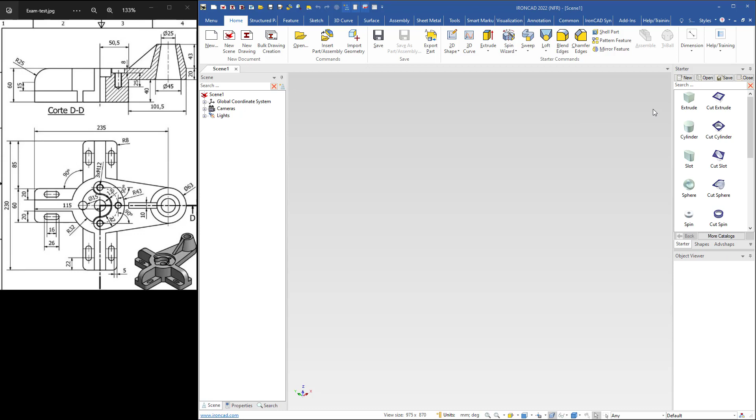So I will start with this part of the item. I come over here to drag an extrude shape, drop it here. And we see that the width is 60 and the height is 60 and the length to the center is 115, so I will change the width to 60 and the height to 60 and the length here to 115.

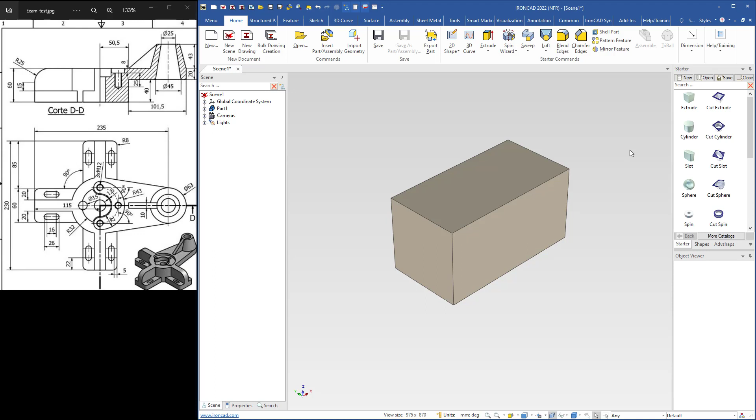And then I need to cut here on this side, and on the other side we see it here. So I will use a cut extrude, drop it here. Then I grab this handle and use the shift key to snap to this side, and I do the same here. Use the shift key to snap, and the same on this side.

And the width of the cut should be 20. So I select this handle, type 20, and the depth will be 25 plus 15. So I click on this handle, 25 plus 15, hit enter.

Then I need another one on the other side, so I turn on the TriBall, and I move the TriBall by pressing the spacebar to unlock it first. Then I can right click the center handle, midpoint of edge and this edge. Lock the TriBall by pressing the spacebar again. Right click on the orientation handle, mirror and link. So now we have made a cut on the other side.

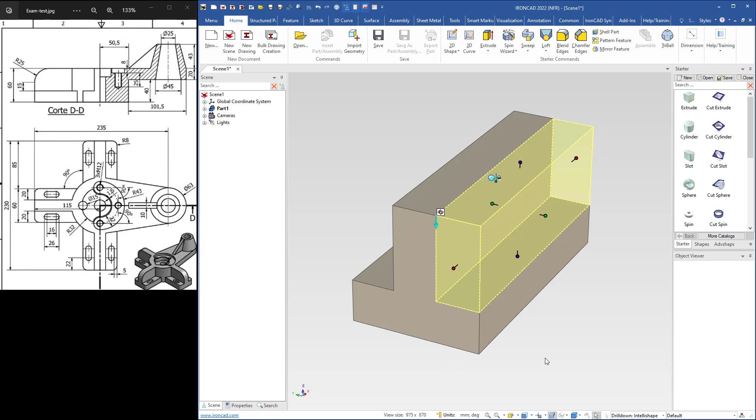Then I need to add a slot, or cut a slot here. So I use cut slot from the catalog and drag it and drop it here on the midpoint. Make it go through the part. Use the shift key to snap to the bottom.

And the length of the slot is 26. So I click on this handle, type 26 and hit enter. And the width is the difference between 16 and 26, and that's 10. So I type 10 here and hit enter.

Then it should be positioned 5 millimeters from this edge. So I turn on the TriBall, and the TriBall is positioned in the center, so that means that the distance between the center and this edge is 5. So if I now right click here, edit distance from point, this side, it should be 10, and it is 10 millimeters.

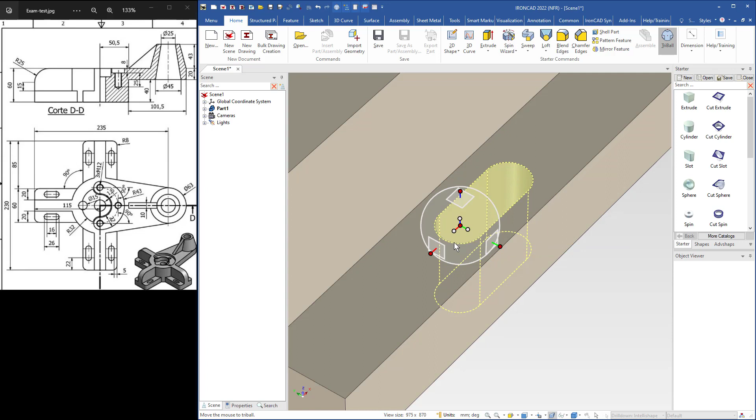Then I will position the slot 22 millimeters from this edge. So I have to move the TriBall, unlock it, right click to center point of this arc, lock the TriBall. Now I can right click this handle and choose edit distance from point, this side, and that will be 22 millimeters.

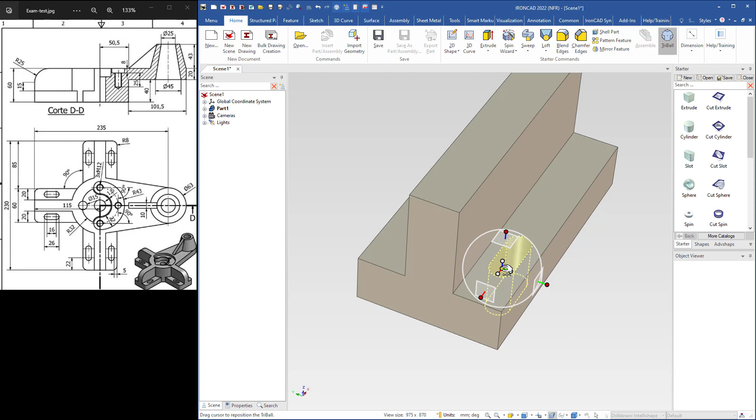So now I had to copy this slot to the other side, so I will use the TriBall to do that. Deselect all axes and unlock the TriBall, right click on the center handle and move it to midpoint edge, this edge, lock the TriBall, right click the orientation handle, mirror and link. So now we have the slot on the other side as well.

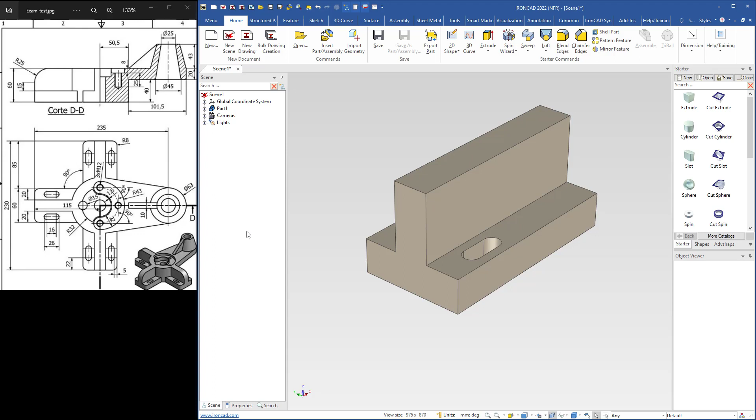Then we have to round this edge and these two. So that one is 25 and these two 8. So I come up here to select blend edges, select this edge, and here in properties I type 25, hit enter.

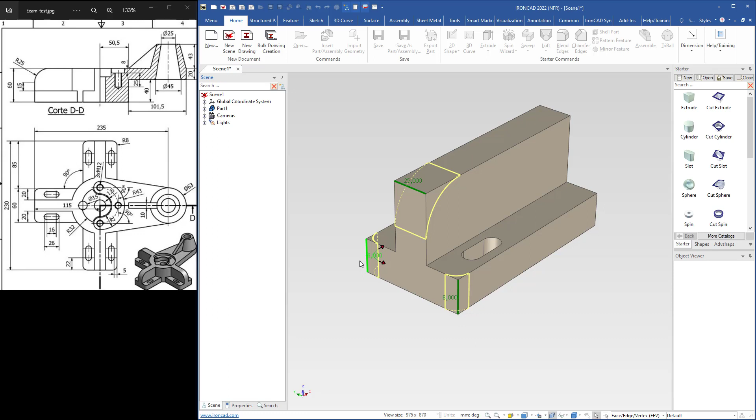Then I select that one and change the radius to 8, hit enter. So now I can select the other one and hit enter again to confirm the command. So now this part is now finished, so I need 2 more.

So I select it, turn on the TriBall, then I move the TriBall to the center here, and that will be the center of this hole. Unlock the TriBall, right click, midpoint edge, this edge, that's the center.

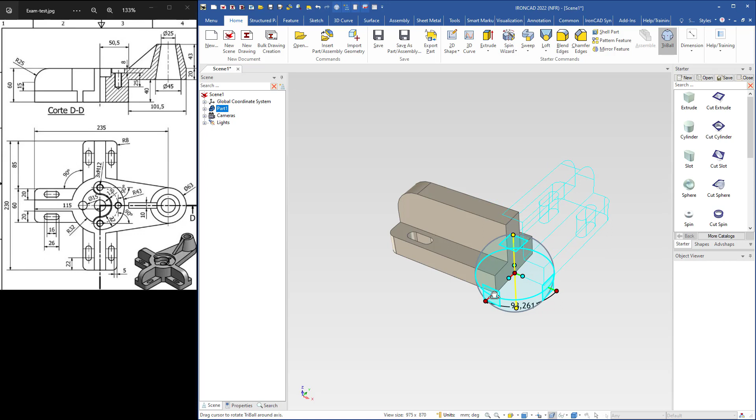Then I lock the triball, select this axis, then I right drag inside in this direction and copy 90 degrees and make sure that reset triball is not checked. Click OK. And the reason why I don't want the reset triball to be checked is, if it's not checked, the triball will be positioned here where I placed it from the beginning, and this part will also be selected.

So now I can right drag inside the triball again, but this direction, right drag and drop it there, copy 90 degrees and click OK. Then I remove the triball.

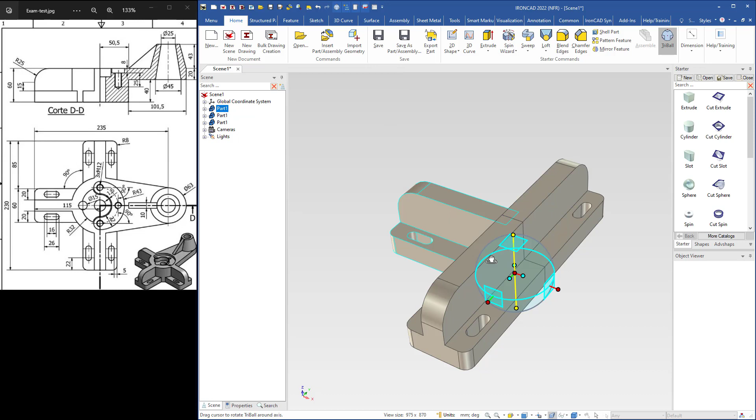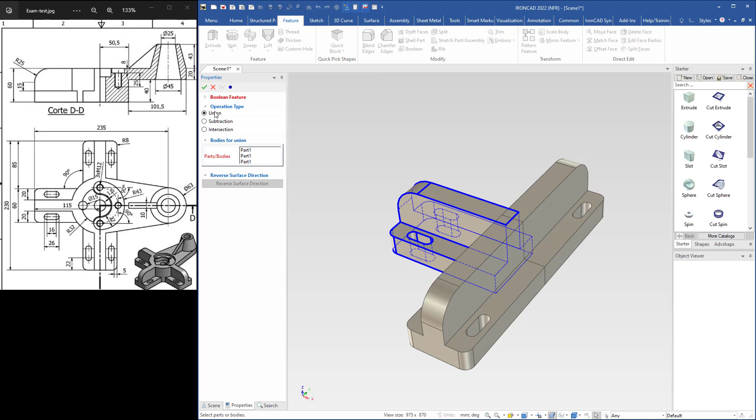So now we have 3 of these, but we need only, but it should be one part, but there are 3 parts. So when that one is selected, I press Shift and Shift select the other 2. Then I come up to Feature up here and select Boolean. So now use Union and click OK. So now there is only one part.

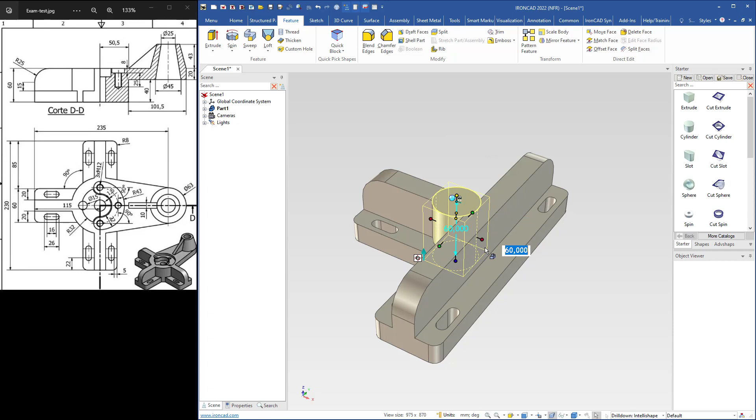Then we will add this cylinder. So I grab a cylinder and drop it here on the center point or the midpoint, then grab this lower height handle, the blue handle, and use the Shift key to snap to the bottom here. Then I use the upper height handle, use the Shift key to snap to the top. We don't know the diameter here because there is no dimension for it.

So we have to figure it out. But I will move this cylinder to the center. So I turn on the triball, right click this axis and choose midpoint edge and that edge. Now it is positioned in the center. And then I remove the triball.

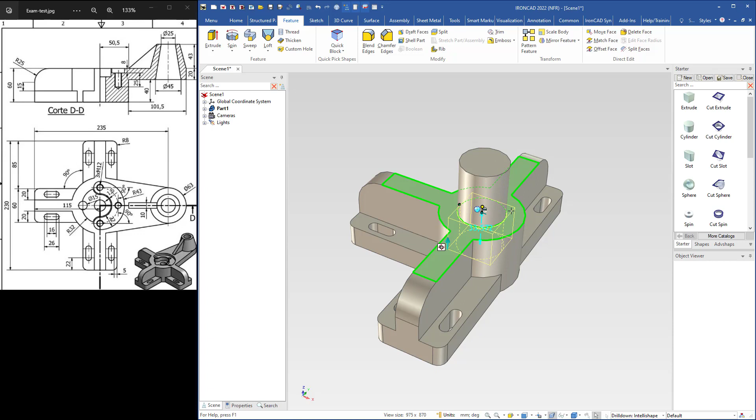But before we decide what the diameter is, we will add this cylinder. So I left drag the cylinder and drop it here so it will be a part of that one. Then I grab the lower height handle to drag down a bit. Then I grab the upper handle, use the Shift key to snap, and change the diameter here to 63 because we have 63 here. Hit enter.

Then I use the triball and drag this cylinder out a bit. So now we have to decide how far this cylinder is from the center of that cylinder. Well, we will use our calculator. I'll drag it here. We see that this distance is 235 to the center here.

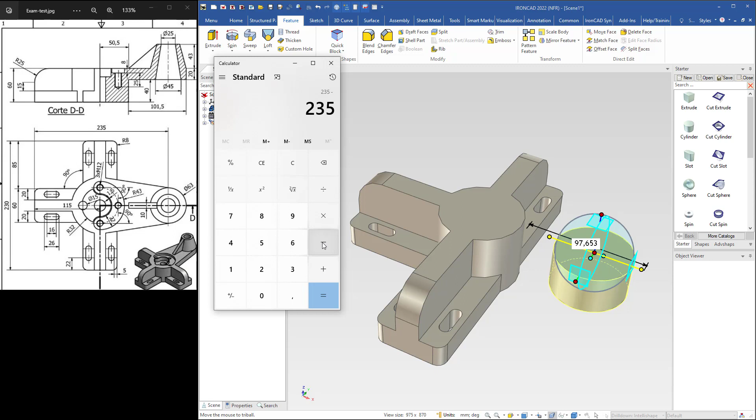So I will remove that one. 235. And the distance from that edge to this center is 115, minus 115 equals 120. So we have to add 120 here to get it in the right position. And then I remove the triball and change the thickness.

The thickness is 20 millimeters, we have it up here. Select that handle, type 20, and hit enter.

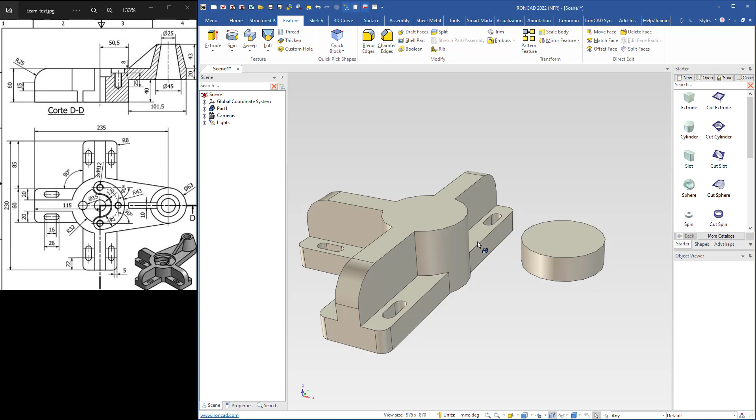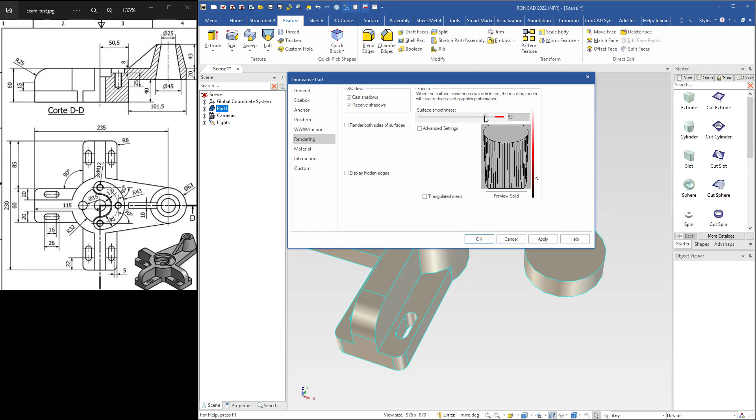If you see that the parts are a little bit edgy, we can select the part, right click, go to Part Properties and Rendering, and increase Surface Smoothness up to 60 or even more if you want, but 60 is okay, like so.

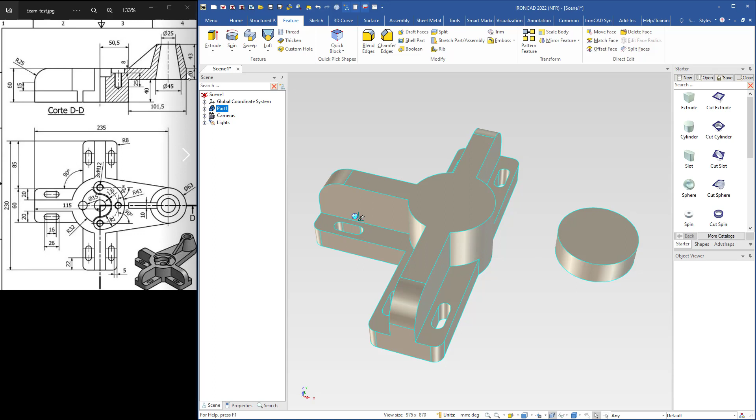So now we have to figure out what is the diameter of this cylinder. Well, we know that the distance between this center and that center is 120 millimeters. And we have also this dimension that the distance from this side of the cylinder to this side of that cylinder is 101.5. So we'll do like this.

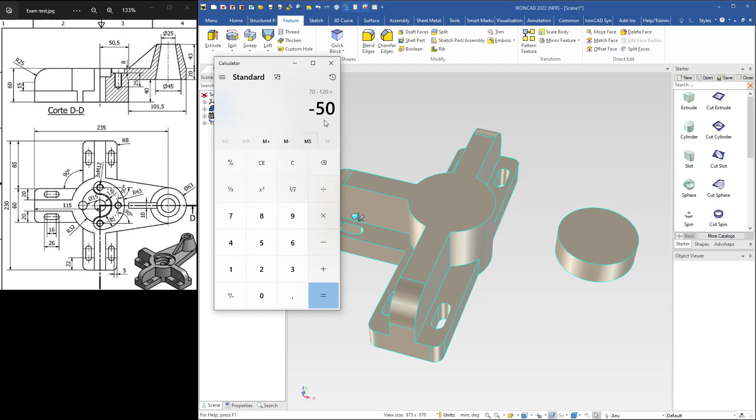I will remove that, 101.5. And then we need to remove the radius from the diameter of 63, that's minus 31.5 equals 70. So we have 120 and we have to remove 70. That means if I now click minus 120 equals minus 50. So the radius of this cylinder is 50, that means the diameter is 100 millimeters.

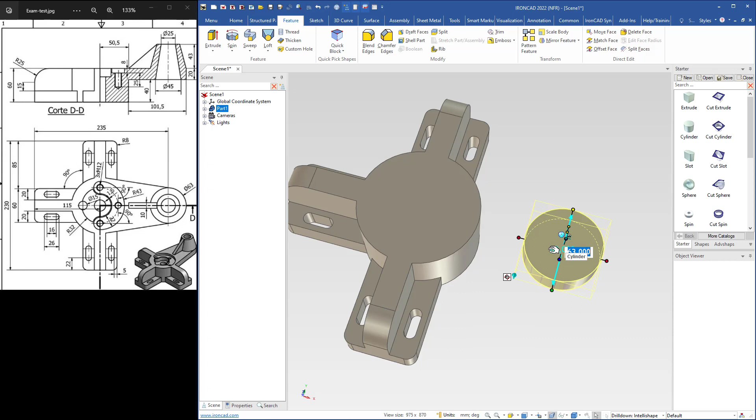So type 100 and hit enter, like so. And then we need to connect these two, so I select that one, right click and go to edit cross section, and now we are going to connect these two.

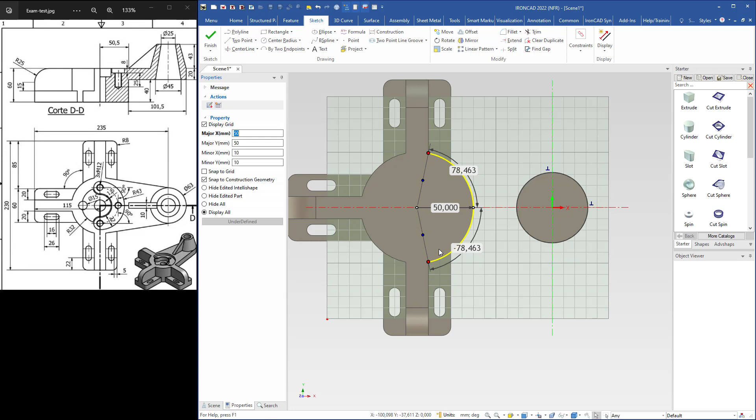First I will go up to project, and we're going to project this side or this part of the cylinder so that we get an arc. Then I press escape to exit the project command, and we extend this arc a bit by grabbing the handles, like so. Now we can come up here to select 2-point line, and I will drag a 2-point line here, and on this side press escape to exit the drawing command, grab this endpoint and move it to the arc.

We see that now this tangent constraint is visible. Now I can right click and lock it. Do the same here, right click the constraint and lock it. Then I come up here to constraints, use tangent, select the line and then the circle. Do the same on this side, like so.

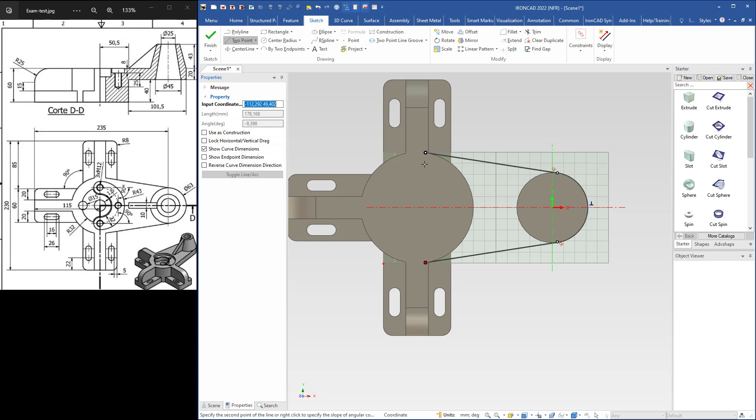And then I can use trim to trim these lines and this circle, and that one, and this one, that one, that one, and also this part. Then I use a 2-point line to connect these two endpoints. Then I click OK. So now they are connected.

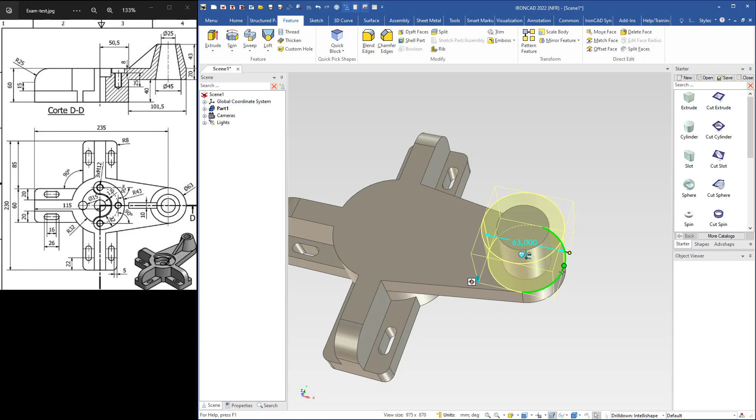Next step is to add this cone. So I will drag a cylinder, drop it here in the center, and it should be the same, the diameter should be the same as the diameter of that one. So I snap it to this edge, and the height should be 43, as we see here. So I type 43 and hit enter.

And then we will also make a cone of that cylinder. So we go to IntelliShape level, right click and go to edit feature options, and here we have draft inward.

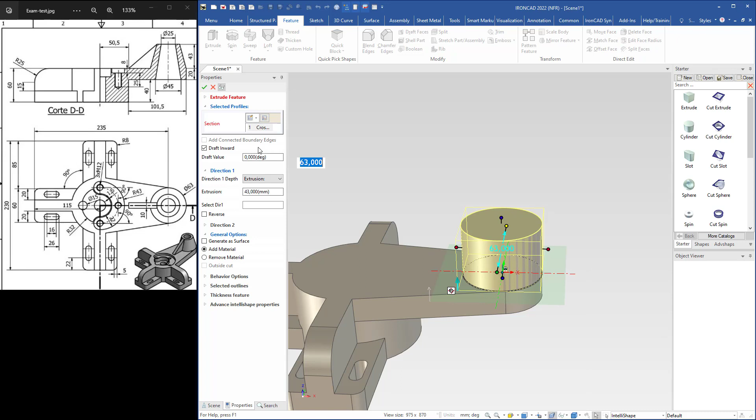So we change the degrees, and I've done this before, so I will try with 15. We see that this will be the preview. So type 15 and click OK, and it will look like this, and I think it will be alright.

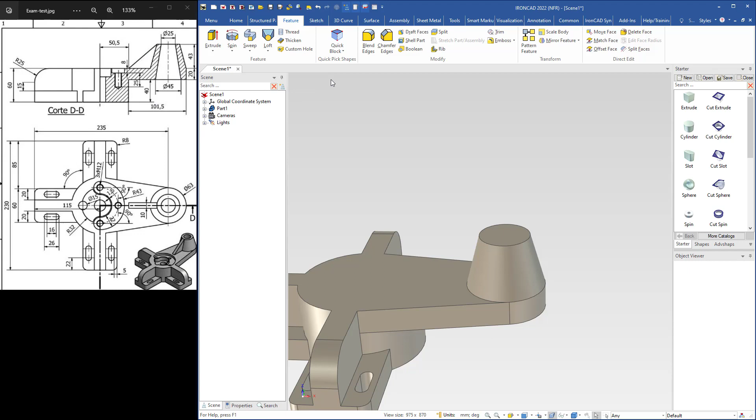Then we will cut this hole, and to do that we go back to the Home tab and use Spin Wizard. Click Spin Wizard, click here in the center, and we're going to remove material, click Next, 360 degrees along the selected surface, and then I click Finish, and we get this grid where we can draw the cross section.

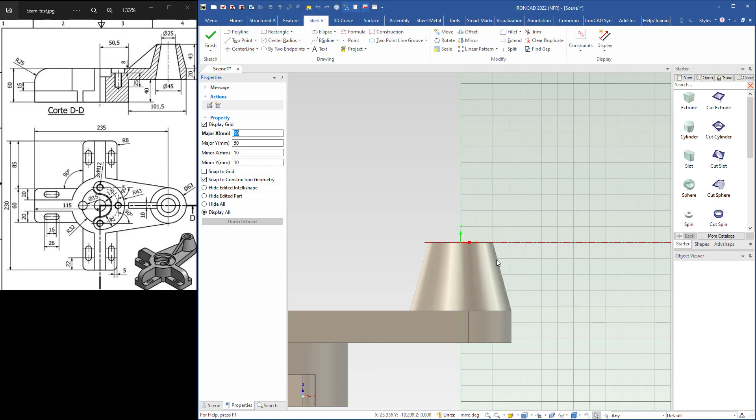So then I come up here to project, select this edge here, and then this one. Then I press escape to exit the command. Then I come down here, drag the endpoint to the y-axis, and then I click on this side and make sure that this arrow is pointing in this direction.

Now I can double click this value, and we see that the diameter here is 45. That means 45 divided by 2 to get the radius.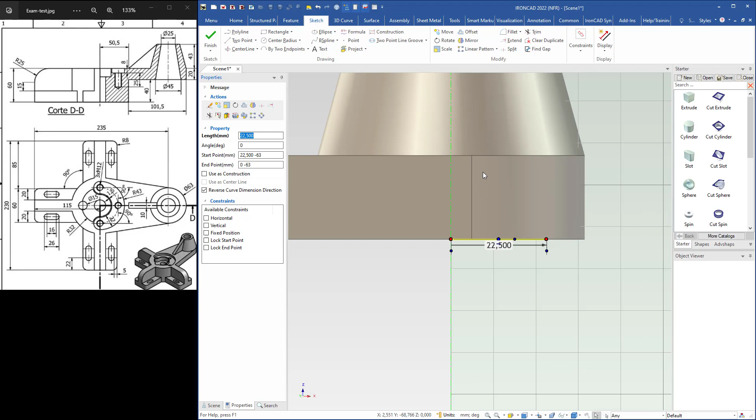Then I come up here, select this line, grab this endpoint to the y-axis, make sure that the arrow is pointing in this direction, and here we have 45, double click the value, 45 divided by 2, and hit enter.

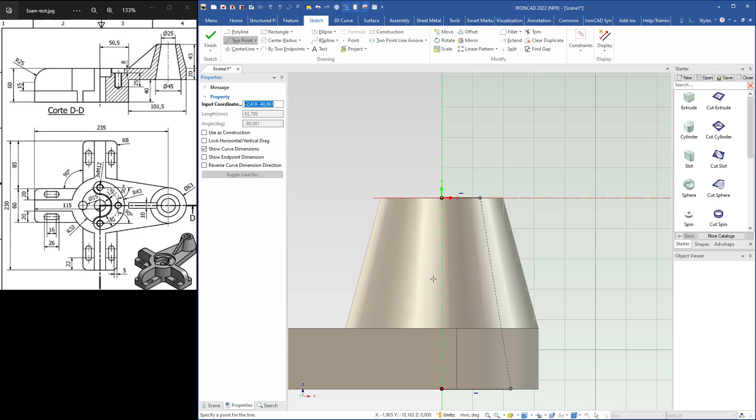Then I come up here to select 2-point line, click on this endpoint and this endpoint to connect them, and we don't have to add a line here in the center, because when we click Finish, Ironcad will add that line for us, like so. So now we have added that hole, or cut that hole.

Next is to add this support, or this rib, and here in Feature we have a rib command, but before we can use it we have to draw a guide curve or a guideline. So we are going to use a sketch.

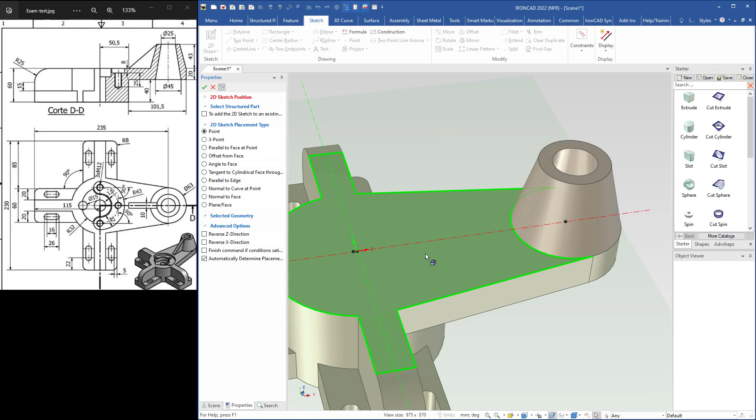So I click this button here, then I select this midpoint so that we get this plane in the center. Then I click OK to add it. Then I turn on the TriBall. We see that the rib should start 50.5 millimeters from the center.

So now I can right click this handle because the TriBall is positioned in the center of this grid. And here I choose edit the distance from center point of this one. Sorry, we have to do like this. I drag it in this direction.

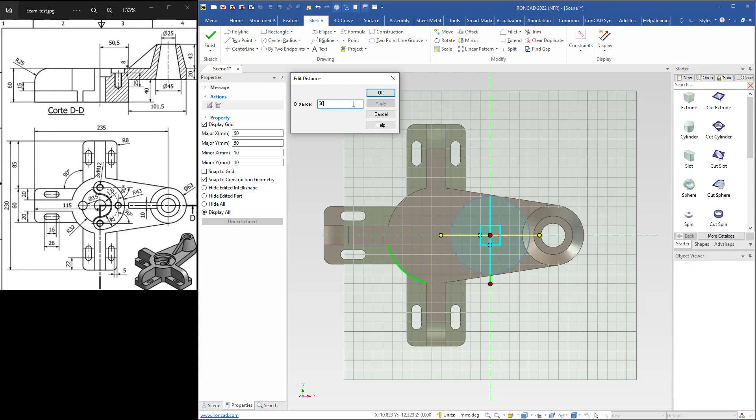Now I can right click here, and then I use edit distance from center point of this center point and not that one. That should be 50.5. Click OK, and then I turn off the TriBall. So now it is in the right position.

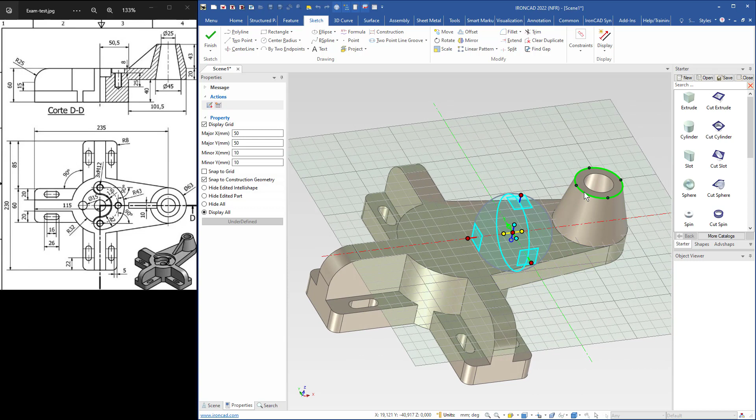And then we have to rotate this plane, so we need the TriBall again, of course. I select, move the camera so that I can see this orientation handle. I right click this orientation handle and choose to point, and it should be pointing to this node here. So I click the node on the node. So now we have the right angle of this plane.

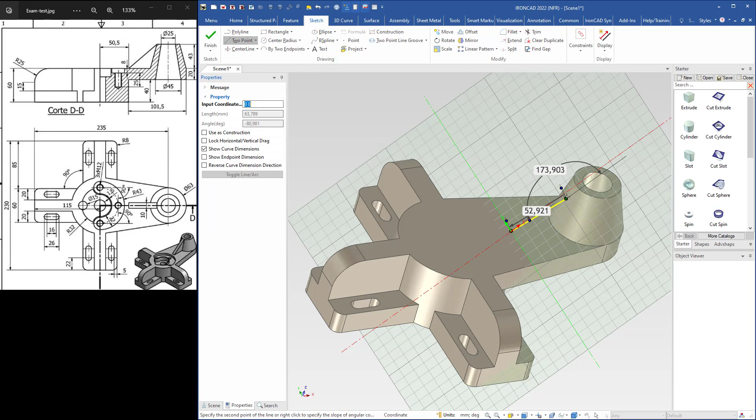So now I can remove the TriBall. Then I have to draw the guide curve from the center here up to this node. So I grab a 2-point line, click here in the center, and then I click here where this node is highlighted in green. So now we have the guide curve. Then I click finish, like so.

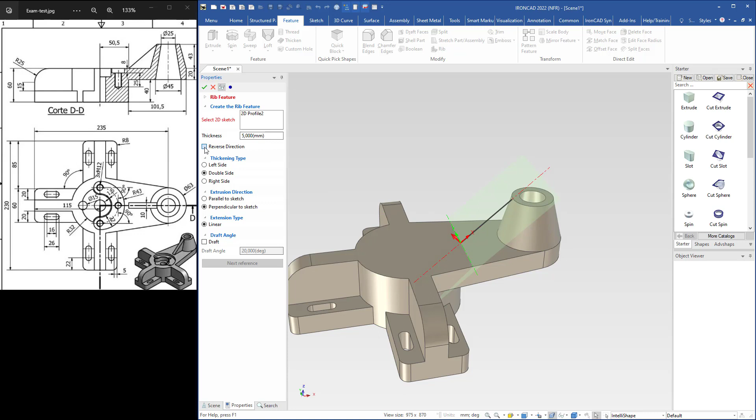So now we can come over to feature and select the rib command. Select the part, and we see that Ironcad finds the 2D profile, but we have to change the direction. Now it's pointing upward. So if we click the reverse direction, we see the preview of the rib, and change the thickness to 10. We have 10 here. Hit enter, and then we can click OK.

So now we have the support or the rib. Now we can select the 2D profile here, right click and suppress it.

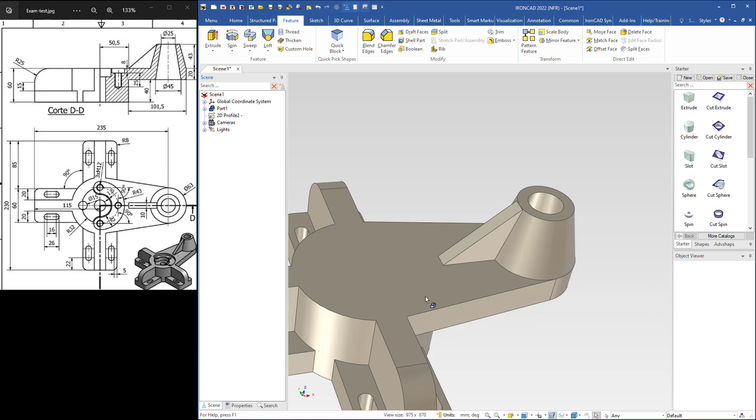Next step is to cut this curved slot, and we're going to use, there is a curved slot to use in ICM add-on if you have that installed, and in mech components you have a slot hole here. But I will show you how you can create that curved slot without that add-on.

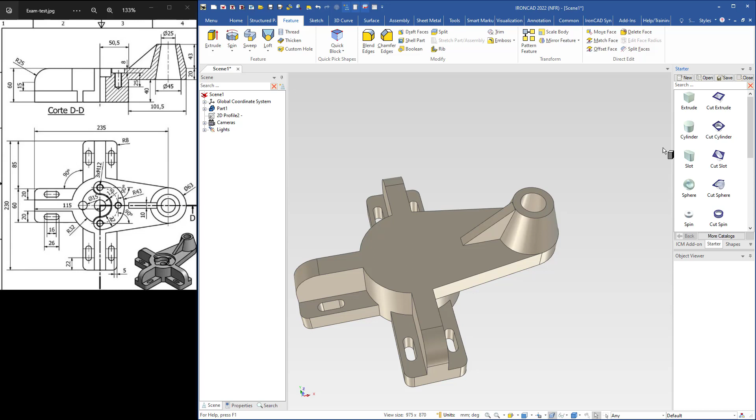So I will use a cut cylinder, drop it here in the center, and then the depth of that slot should be 8 millimeters.

So I will grab the lower height handle, drop it there and type 8. Then I'll right click here inside, go to edit cross section.

The diameter or the radius of that circle should be 43. I select the circle. Here we have the radius value. I type 43 and hit enter.

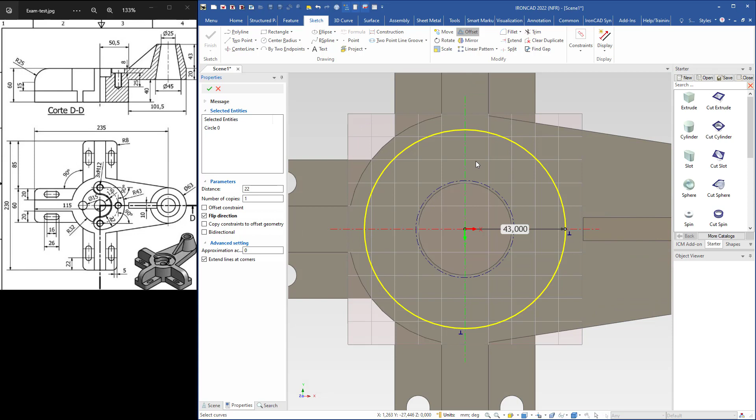The width of that curved slot should be 22. So when it is selected, I come over here to offset, and the distance here says 10. I will change that to 22. We don't need any offset constraint, but we have to flip the direction so that it will be on the inside. Then I click OK here.

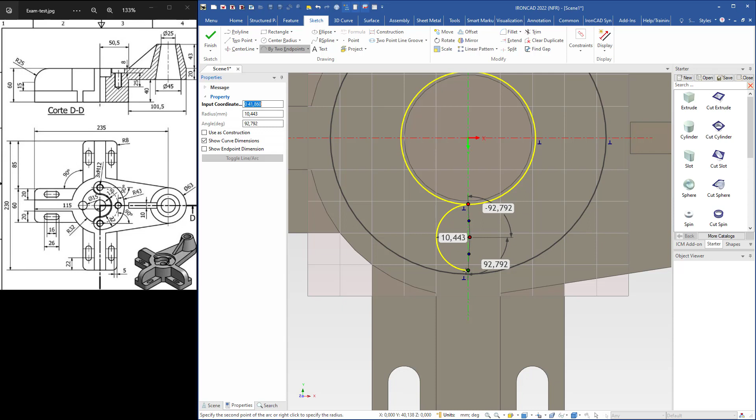Then I need to add 2 arcs. So I come up here and select 2 endpoints, like so. Then I click here and here. Then I come down here to do the same, first point, the second point. Now I can come up here to select trim and trim this circle and that one. So now if I click OK, we have that curved slot.

Next step is to make this cut with a thin, very thin wall here, 1.5 millimeters. We use a cut cylinder to do that. Drag a cut cylinder, drop it here, and the depth of that cut should be around perhaps 15, 16. We see here there is no dimension set for that, but I will change that to 16, hit enter.

Then I right click inside this cut cylinder, go to edit cross section. The circle is now set to radius 20. We see here that the radius should be 32, so I type 32 and hit enter.

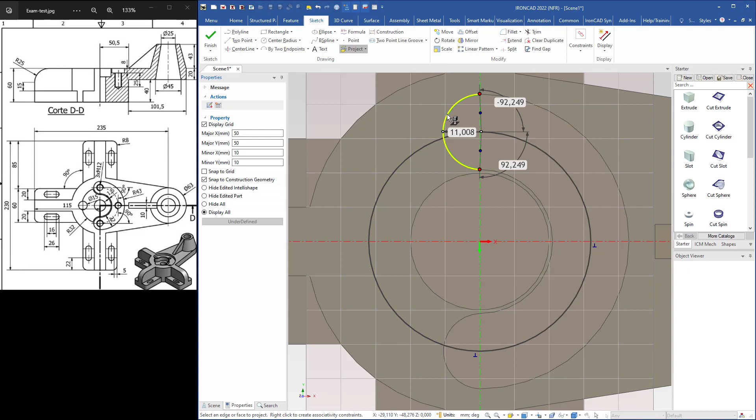Then we are going to project these arcs so that we can make the thin wall. Before we project, we make sure that nothing is selected. Then we can select the project command and select these arcs like so. Then I press escape. So now I deselect everything again.

So now we have to make a copy of these arcs. We'll come up to offset, and here the distance should be 1.5 because that's what we have here, 1.5. Then I'll select that circle or that arc and make sure that we have the copy on this side. If you have the copy on the other side, you have to flip direction. Then I select that one and this one. Then I click OK here.

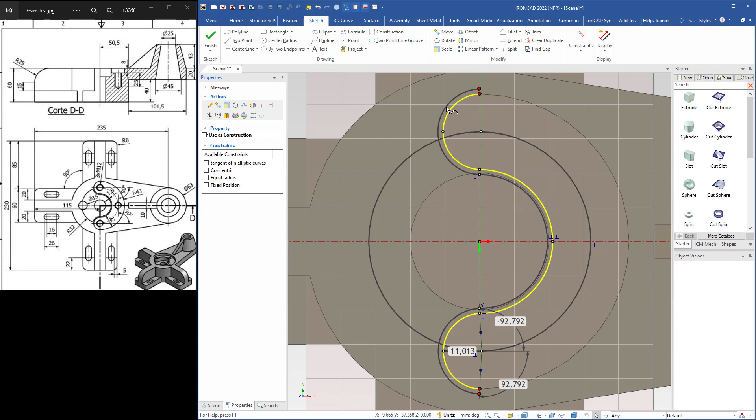So now we have a copy, and we see now that these arcs are selected. We can press delete to delete them. Now we can trim the circle and the arcs like so, and this one as well. Now we come in here, select finish.

So now we have made that cut. And then there is a hole that goes through from the bottom of this cut to the bottom of the part. So I will grab a cut cylinder, drop it here in the center.

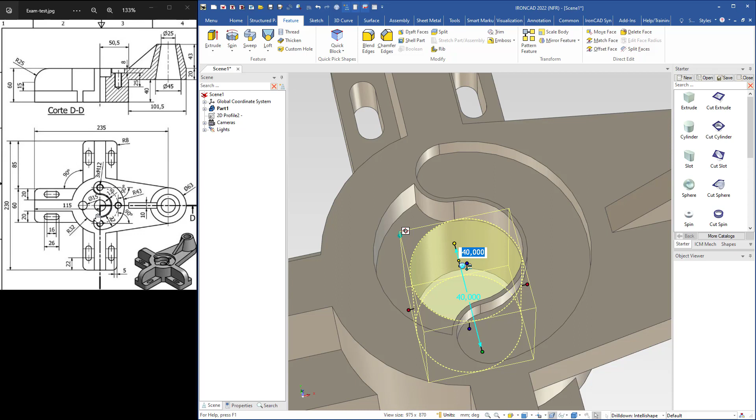And the diameter, well, I'm not sure because there is no dimension here, but I think I will change that to perhaps 18 or something like that. And make sure that it goes through the part. We'll snap it to the bottom.

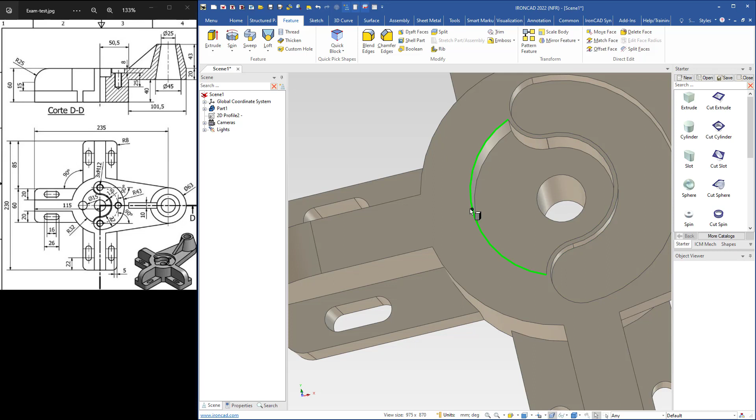And then we will also cut this hole that has a diameter of 15. Cut cylinder, drop it on this node and type 15, and the depth should go to the bottom of this cut.

Then we will add threaded holes, and there are a couple of ways to do that. If we click more catalogs, you have tools, and here you have custom holes. You can add holes, threaded holes.

But if you have ICM add-on, that means Ironcad mechanical add-on, and go to mech components, you can use these holes, this hole tool. Or you can also come here to ICM mech, and here you have holes. And I will use this one.

And I will drag it and drop it here at the bottom on the center point. And in this menu I can choose a threaded hole. It should be M12 because we have M12 here, and the depth is 25. M12, length 25. Then I click OK.

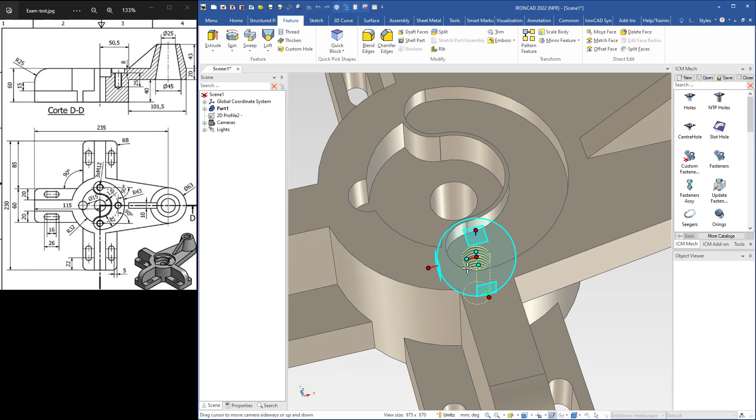So now I can copy this hole. I unlock the triball, right click the center handle to the center point of this hole, lock the triball again, and then right drag inside in this direction and link the holes. I need two, but 90 degrees, and then I click OK, and then remove the triball.

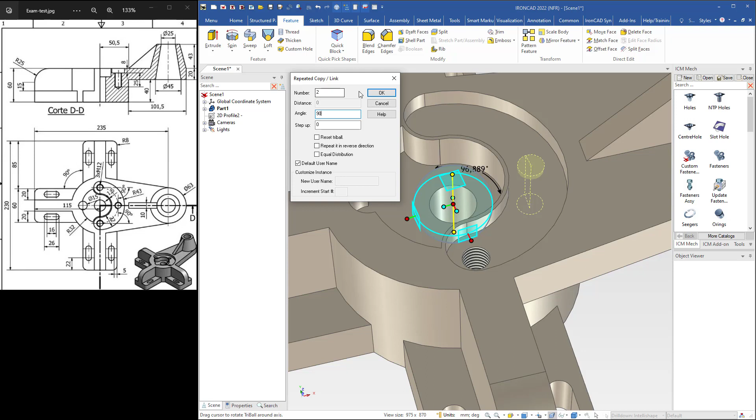So now I have the holes here, like so. That's how you can create this part in Ironcad.